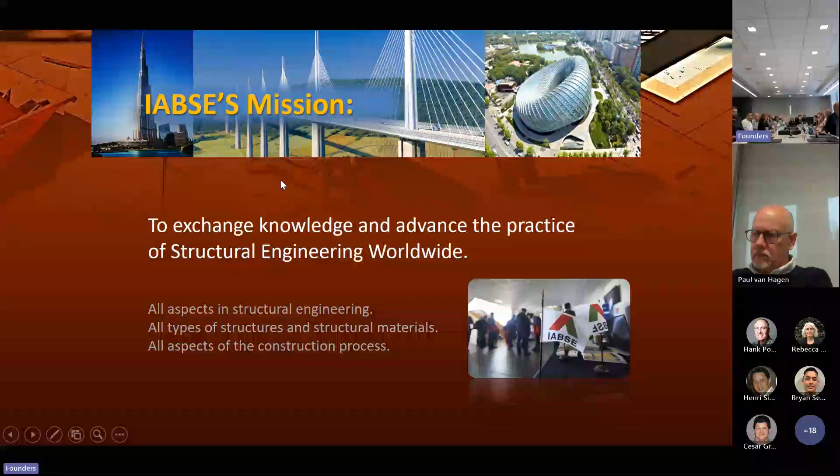I'm having to use the mouse to control the screen and then my other hand to control the laptop. So bear with me if I get in a bit of a tangle, but hopefully I'll be able to kind of write it as we go through.

So my name's Ben Addy. I'm the managing director of Moxon Architects. We're based in London and also in the Highlands of Scotland. We're quite unusual as a practice to have a very urban location and a very rural location. We're also a very unusual practice in that we do conventional architecture, so buildings and product design and what have you, and you'll see some examples of that. But we also do bridge design, which is obviously the reason why we're in this room with you today.

And key to that is my good friend and colleague Ezra Groskin here, who shares a background in bridge design and bridge architecture with me. So I don't know if you want to add a few more words. Yeah, as you might recognize from my accent, I'm originally from the US, so this is sort of like coming back for me. But I've been working in London for 15 years, kind of exclusively designing bridges, and then I joined Ben about 8 years ago to continue that work.

But quite special to be in a small practice that does bridges and buildings, which is a balance I was looking for. And I think you'll see, whether we're working on a bridge or on a building, we bring the same kind of interest in design and interest in solving puzzles and interest in how things are built. All these things you'll see through the lecture, but those are things that are important to both of us.

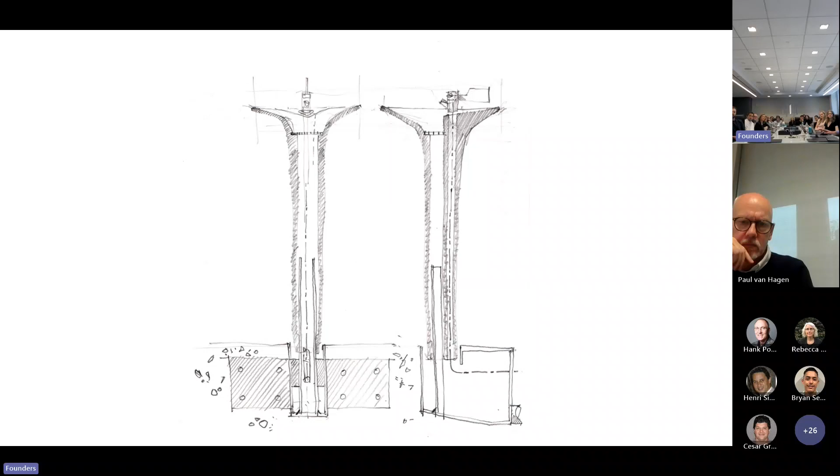Now, it was won in an open international competition, and it's the first of two examples of industrial design that I'll share, because it encapsulates this idea of economy of purpose. So it does the thing that it's supposed to do, which is deliver clean, hygienic water, but it does several other things at the same time, to all manner of users, canine and otherwise. So there's a dog bowl at the base, which is the overflow from the top. It drains down into this dog bowl before it then goes into the sewer system.

That's also a trap. So if someone drops their wedding ring in the top, it'll go down the funnel and pop out the bottom into the dog bowl. You might need to clean it afterwards. But it's this idea of achieving several things at once. It's also a bollard. So this thing can be used as a vehicle restraint bollard. The way in which it connects at the bottom is integral to that. So it can stop a light vehicle.

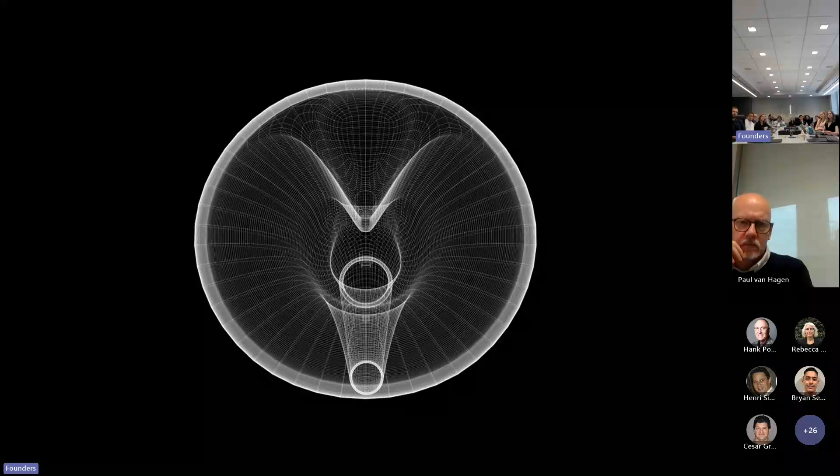And you can see here the refinement and the geometry, which is really important to us. You've got this one single form, which is the mounting for a faucet, for the tap. It's a bowl for splashes. You've got the drain. You've got the sleeve connection from the base.

The design is tap agnostic, so you can fit any tap that's available on the market onto this thing, which is really important for longevity, so that as tap technology develops, you can put a new infrared tap on the top or what have you. And again, that's something we've taken from that architect at the beginning, Cedric Price, who had this idea of flexibility in use, which is really important.

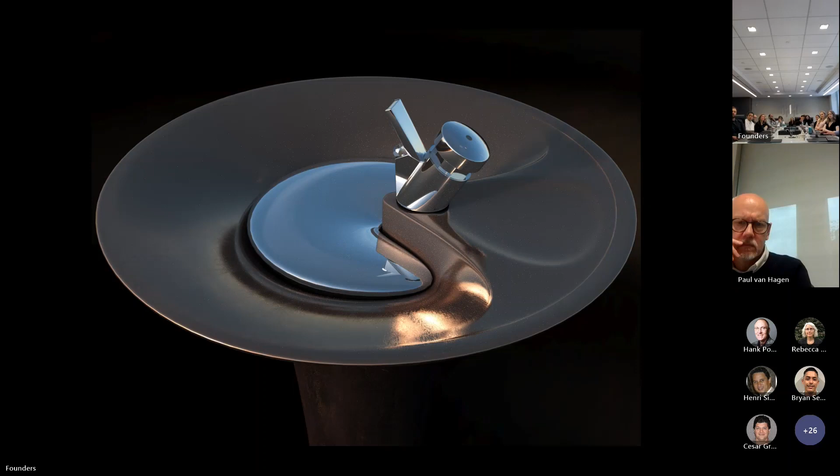And then we're interested in aesthetics as well. So the form of this thing is really important. It was one of our first forays into rapid prototyping, which is obviously common in what we all do now, but this is like 15 years ago. And this was kind of novel for us.

Are you able to? Yeah, that's probably better. Yeah. Right, we're going to team effort this. It'll go a bit quicker now.

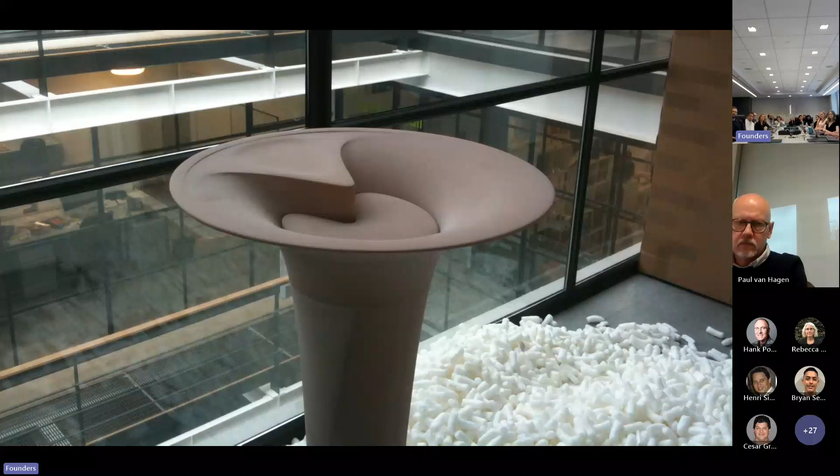So this is the actual master part that was milled from the material that then went into form the lost wax casting. So this is in a bronze foundry in Wales in the UK. And you get this incredible kind of beautiful bronze piece that comes out at the end of the casting process. You polish it up. Here's our first customer in the Royal Parks. And then it patinates over time.

So the weathering, the way this material behaves over time, again, this comes back to bridges. It's exactly what we think about all the time. And then here's one of them outside Kensington Palace. I think there's about 3 or 4 in Kensington Gardens now, but like I say, they're all over London. The dog's just been at that one 5 minutes beforehand. This is our first bridge of the afternoon.

So that's our kind of design philosophy in a nutshell through that project. And I think hopefully, yeah, there we go. So this, Duke's Meadow Bridge. So this is a footbridge in West London that we designed with COWI. So we work with various engineers, and we're really keen to be working with yourselves, both in the UK and ideally in the US in the near future.

But you'll hear me talk about various engineers that we work with throughout, because it's always a team effort. It's never about the architect says this and someone else has to make it work, or vice versa. It's always a team effort.

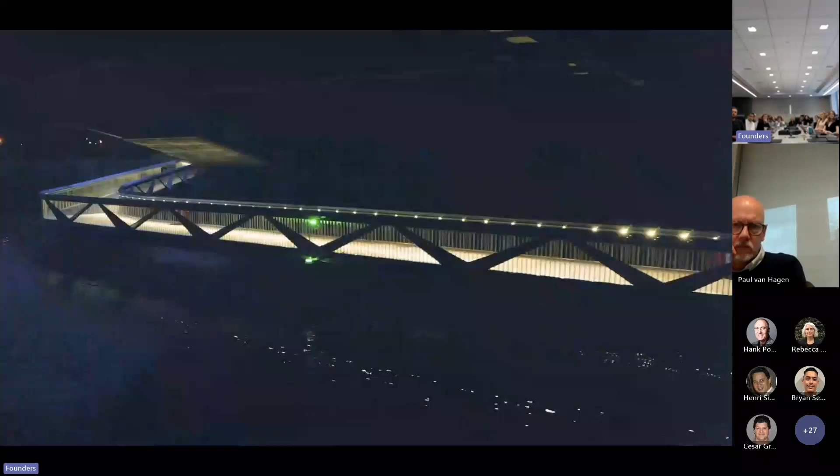This bridge doesn't go across the Thames, it kind of runs alongside the Thames, and it fixes a link of what was a previously broken Thames path that runs along the river. And the second of our bridges to do this, actually after another one in East London. But here you can see the parapet is the primary structure, which allows us to kind of thread this thing underneath the existing bridge and still maintain clearance between high tide and headroom underneath the arch of the bridge.

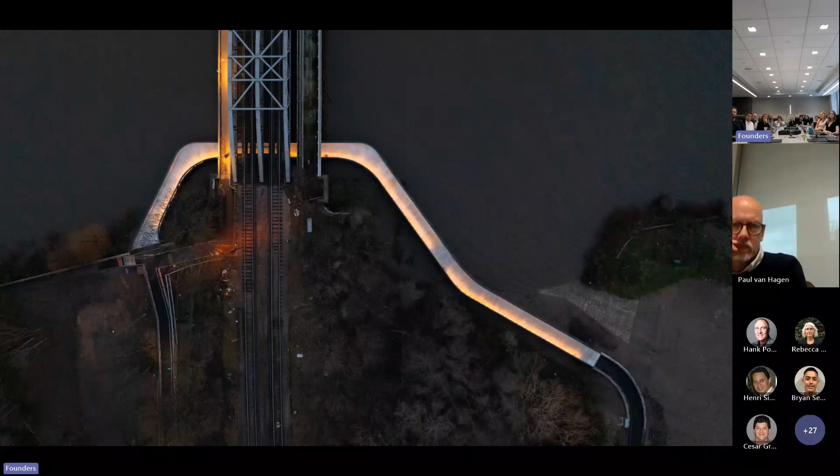You can see in the plan here how, I mentioned about the belvederes on the bridge. This is the one where just the widening of the corners there enables people to kind of congregate on the deck. See, get this amazing view up and down the river. It's also a perfect location to watch the Oxford-Cambridge boat race. This isn't the boat race; these are amateurs. But you get the idea. It provides this new space in the city, just from otherwise a very functional link along the river.

Some more views of it. So you obviously identify this as a very, very simple truss, but we're using the truss as the handrail and the restraint all at the same time. So the structure, the parapet, everything is one piece, which again is about efficiency.

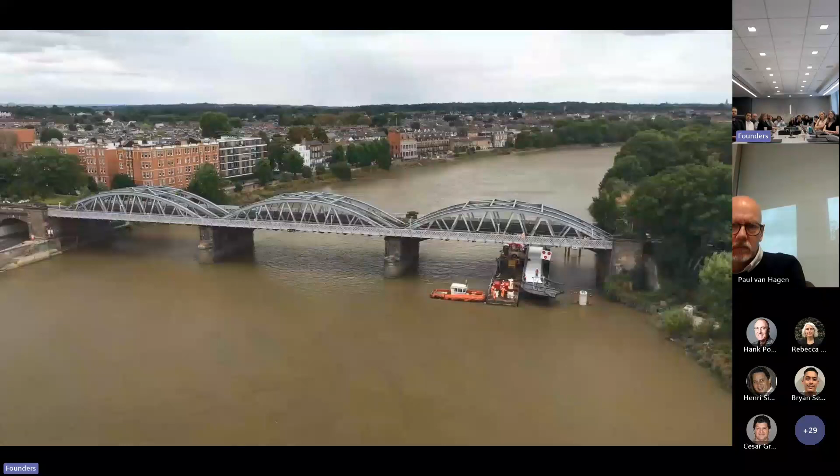Now, each part of the bridge was brought up the Thames from Tilbury Docks in East London. So it was floated above the piers, and the Thames is tidal at this point. So as the tide rolled out, the deck was lowered onto the pier. So you let nature do the work, which is the most efficient thing you can do.

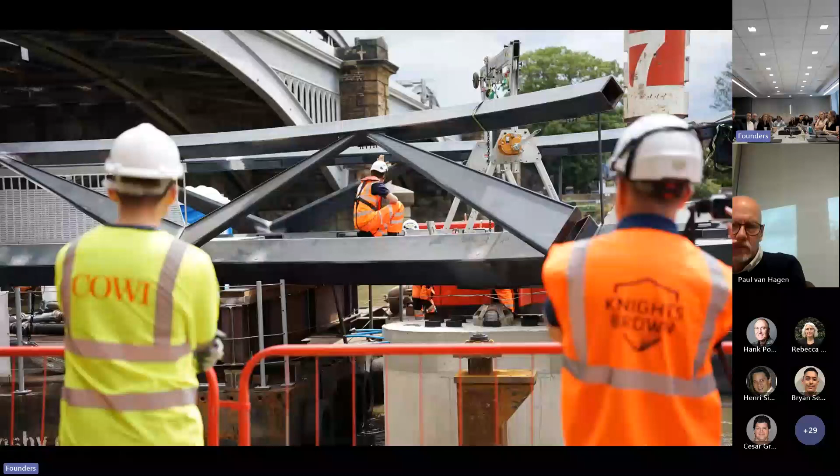Of course, it's not quite as simple as all that, because while we're relying on gravity, we also relied on a particular bit of temporary works that was designed by the engineer, a guy called Chris Murphy, who designed this 3-part locator pin, which is a component on top of the pier, without which this bridge would not have ended up in its perfect final location. It's somewhere in this photograph, and no one who uses the bridge is aware of that, but we're aware of it. And if it wasn't for that locator pin, the bridge would have been very different.

And again, bridge engineering in particular is full of these kind of stories of ways of achieving things in construction that could not have occurred without that kind of genius going on. So it's a privilege to be part of that kind of conversation with architects.

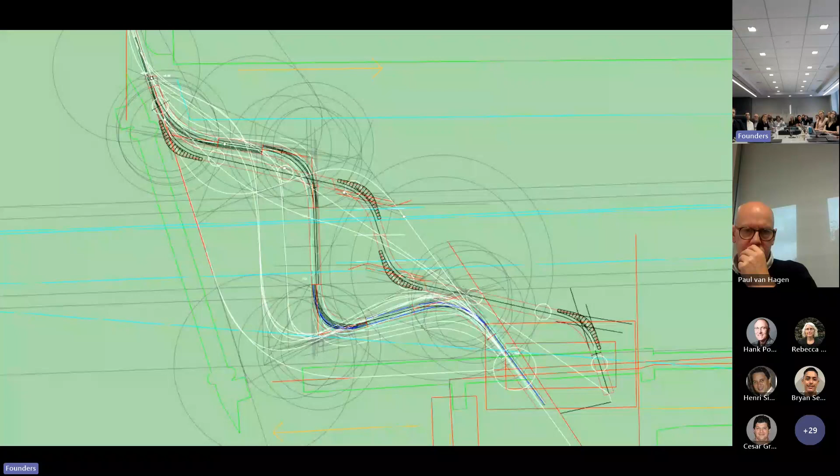Now, the next bridge that we're going to show does legitimately go from one side of something to another. In this case, it's the Royal Victoria Dock in East London. We love getting involved in drawings like this. So this is a drawing where we're looking at the constraints of a structure. We're looking at navigation channels that we need to maintain, the landing points. There's discussions with structural engineers, civil engineers, and also mechanical electrical engineers, all involved in this one drawing. This is where, as a team, we're working on this drawing together to work out what's the best alignment for this bridge.

You can see the ExCeL Centre at the top. There's a new development at the bottom, basically going to be thousands of new homes in the bottom right-hand corner, a big development going on. And then in the top left-hand corner is where there's a new train station. And people need to get from one to the other. So that's what this bridge is for.

So A to B, a straight route would seem to be the most logical thing. However, the blue lines in the middle, we need to maintain an infinitely high navigation channel. So we need an opening bridge. If we have a diagonal line across that channel, then that's quite a long opening section. So you want to come as square as possible to it, as perpendicular as possible, to minimize the cost. And the cost of the opening section is way more than the cost of the backspan.

So hence these kinds of studies, this sort of exploration. And eventually we arrived at this kind of form, which although it might seem inefficient, is actually not that much longer than a straight line, but crucially it has a perfect or nearly perfect perpendicular opening section, which keeps the cost down. So this structure was granted planning permission earlier this year, and the contractor is on board now. So I think construction is going to be starting this year at least.

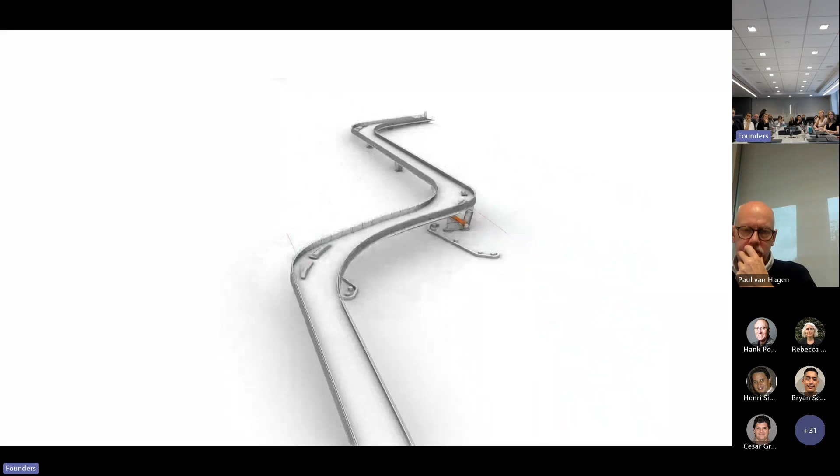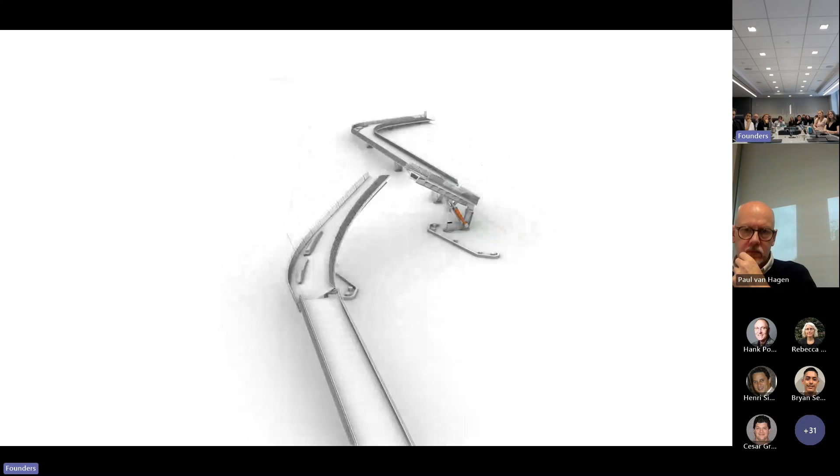And you can see here the opening section that we're talking about. So very, very straightforward. I mean, I'm in a room full of the absolute experts in opening bridges, so I need to be careful what I say. But you can see that it's a twin bascule. Each leaf of the bascule rests on the pier itself, so you don't need to worry about locking pins in the middle necessarily. The axis of rotation is the axis of the span leading up to the opening section.

So it comes as quite a surprise when this thing opens. It'll have this kind of twisting effect, but actually the mechanism and so forth is really straightforward and simple. And simplicity, appropriateness and a pragmatic approach to design is really important. And for us, the joy is in the detail.

So here you can see these are the actuators. So the rams are in this image on the pier. The little orange bit is where it rests, the bearing when it's in the closed position. The bridge is part machine, and it's quite enjoyable to express that. The design doesn't hide it.

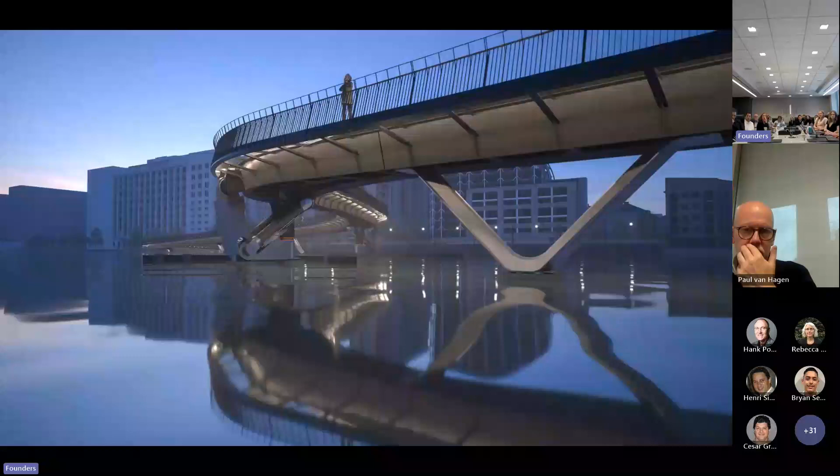And you can see the S-curving trajectory of this bridge. The V piers in the foreground. It's a bit of a vertical curve. So as you go onto the bridge, you are climbing, and then you drop down again, to allow smaller river craft to go underneath it.

So you've got this kind of... that's the new development in the background, which is actually quite similar to Hudson Yards in a way, in terms of the focus on landscape, and we're taking the landscape finishes all the way across this bridge. So it's an extension of the urban realm, but you've got this amazing machine underneath it.

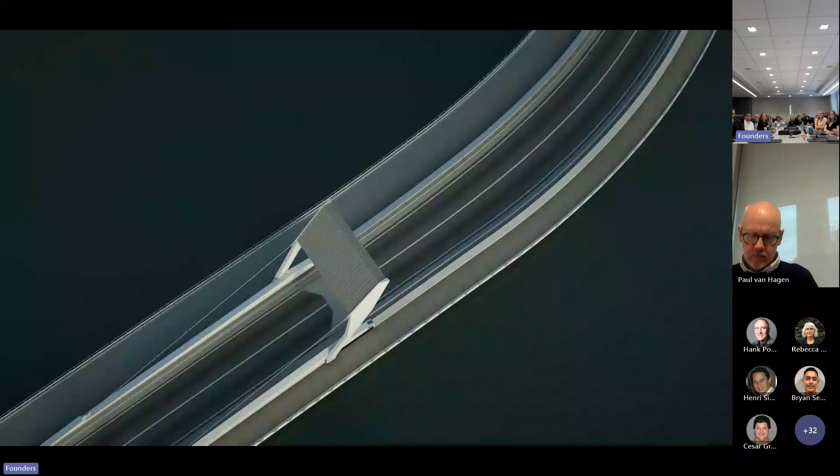Okay, so just briefly on another opening bridge. This time it's in Dublin, in Ireland, where the port has had this amazing boom in business after Brexit. So once the UK left Europe, instead of all European stuff coming into the UK and then going to Ireland, it's bypassed the UK and goes straight to Dublin. So the port is incredibly busy, and as part of that, they need new road links across the river, which need to be opening links because all the other bridges up the Liffey are also opening.

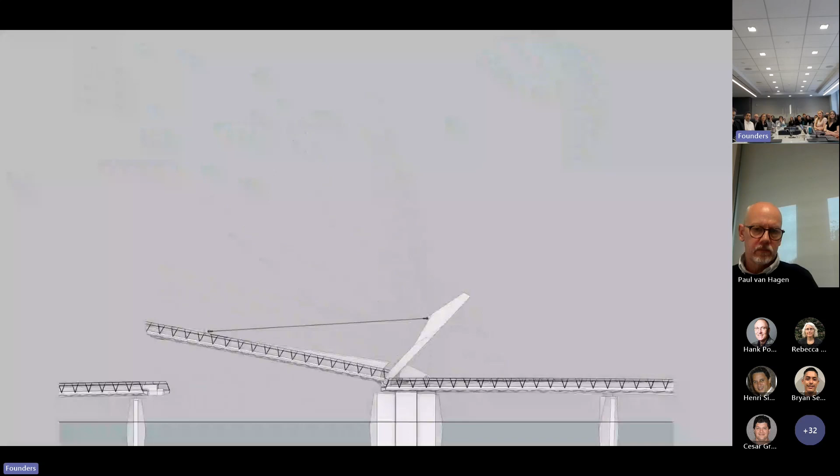So you can see here it's a bascule bridge with a counterweight. So again, nothing unfamiliar. And there it is in the open position. But the sharp-eyed amongst you may have noticed that there's something slightly unusual going on with the pivots, particularly of the counterweight arms. So that gives the game away. So this is another piece of ingenious design, and there's one of our colleagues in the office, a chap called Richard Bridge, which is the most appropriate name for a bridge designer.

And he had this idea that if we introduced another fulcrum, so another pair of pivots, and brought the fulcrum of the counterweight forward of the hinge of the deck, then that would mean that in the opening sequence, the effect of the counterweight would be felt far earlier than if it were just fixed like this. Does that make sense? So it's actually, in terms of energy, a more efficient opening sequence for the bridge.

Plus, obviously, you've got the drama of this sort of scissor movement that's going on. Yeah, I mean, there's always this joy in the detail of how these things all come together. We could spend a whole afternoon talking about the design of this.

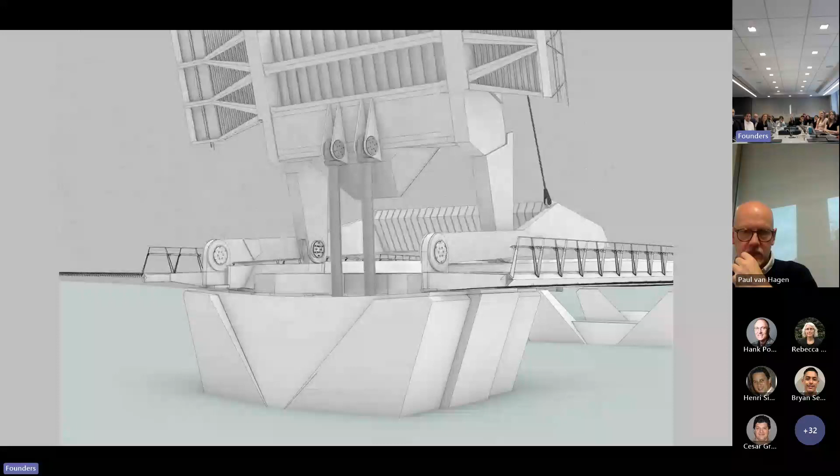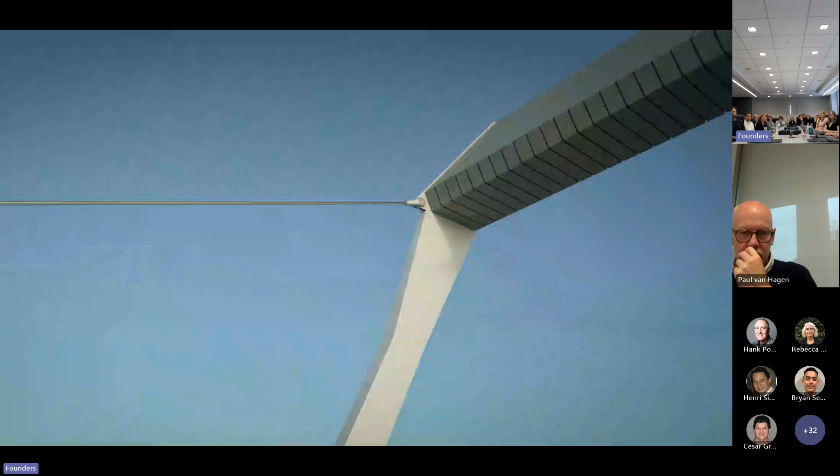Now, in the closed position, the counterweight is obviously also a demonstration of mass and energy, hung above the carriageway, forming a portal. So it's important that this bridge is a gateway both along the river, but also a gateway along the bridge for the port. Now, I think we are still exploring the use of granite as the material for the counterweight. So rather than using steel or concrete, there's obviously carbon savings to be had there. So we'll see where we get to with that.

So the second category was economy of action. And I think for architects, are there any architects in the room? There's one, two, okay. There's at least four of us who are architects. And I think that this is the bit, certainly in terms of bridge design, I don't like to divide it into disciplines because I think it's kind of false, but this is probably the bit where as an architect, you probably do have the most potential for impact in bridge design. And it's about this idea of picking things that can just be turned or twisted or changed just subtly, and it can have an enormous impact on the appearance of a structure.

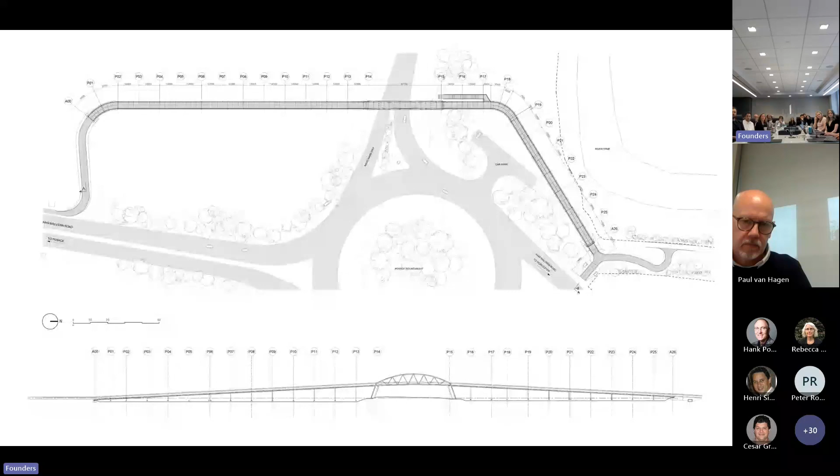So the first example here is this really modest foot and cycle bridge called Hamsway near Worcester in the Midlands of England. You can see even from the drawing, it's a very straightforward brief. It's basically just get around a busy roundabout. And in the elevation at the bottom, you can see it's just a very simple tied arch. It's no different to hundreds of other bridges that cross the trunk roads of England. And indeed, the brief from the client was that it should be like other similar bridges. But what makes this not normal are some very simple, modest moves in the design that elevate the appearance above its more functional utilitarian brethren.

Firstly, you can see here that the parapets lean in the direction of the cycle traffic. So this is a cycle bridge, with hundreds of cyclists today using it as part of a national cycle route. And just that subtle shift changes the perception of the bridge, that someone has thought about it, there's some craft in it, it's relating to the direction of travel.

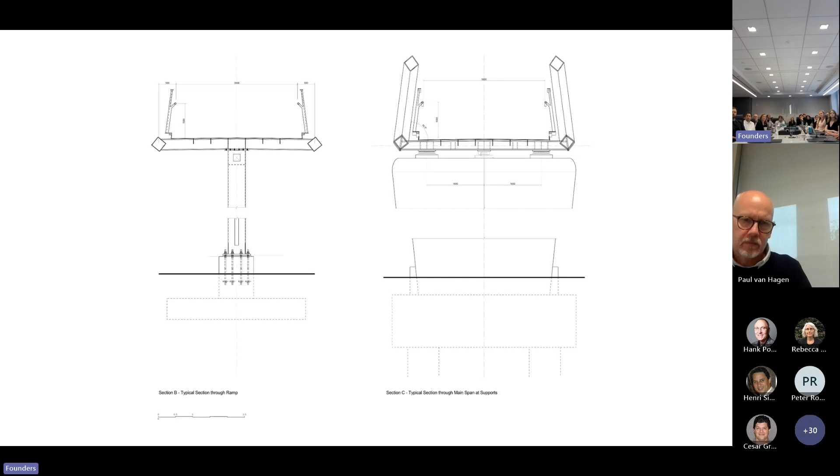The approach spans couldn't be more simple. So on the left-hand side here is the approach viaduct. It's just a series of columns and some beams and then some edge beams. And then on the right is the arch truss. But to unify them, you can see the outer chords, the square hollow sections, have been rotated through 45 degrees. So a very simple move, but when you see it in reality, that has changed the appearance dramatically. So you get this thin edge, you get light and shadow, and the way in which all these pieces come together takes away from what could otherwise be quite a dull structure.

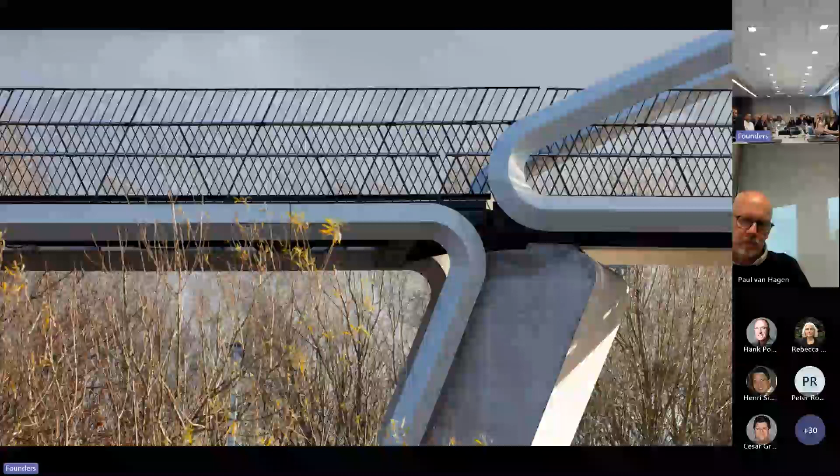And then these two things come together at the springing point of the arch, the main span on the right, and then the viaduct back span on the left. You can see where these things don't quite meet one another. So again, it's about expressing the difference between these two parts of the structure, but it's doing it in a really, we think, beautiful way. Hopefully you'd agree that it's somewhat more elevated from a basic structure.

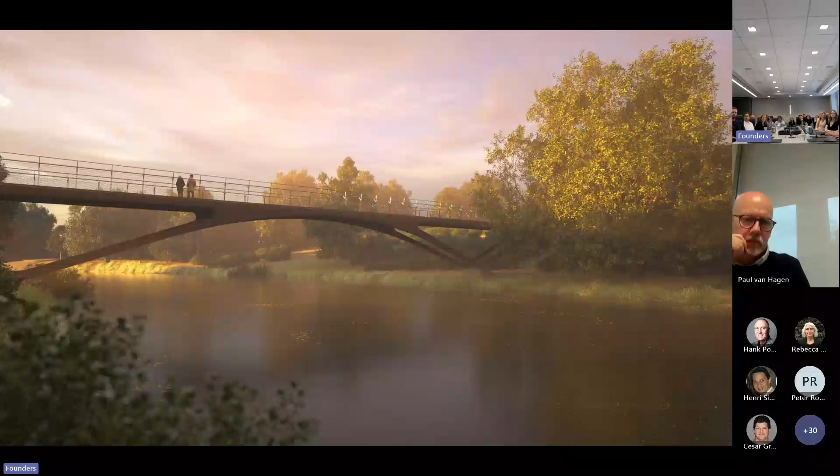Now the same team, again working with colleagues at COWI on another bridge near Worcester, this time across the River Avon. The way in which landscape and bridges come together is really important, I think, for all of us as designers. Bridges can have such an important impact on their settings that you always need to be considering them in landscape terms.

So at the other end of the spectrum, I was going to talk about three of our viaducts for HS2. HS2 is the UK's high-speed rail network currently under construction. And we are part of one of the three very large contractor consortia building the line.

So EKFB, Eiffage, Kier, Ferrovial, BAM, they're some of Europe's biggest construction companies. They've had to team together to build this one bit of the line. And then we're working with Arcadis, Setec, COWI as engineers. And then there's little old us at the end. And we're like the smallest possible cog in this absolutely enormous,

enormous machine. But our clients, it's great to their credit that they have brought architects and our engineers and pushed us right to the front of the process and made us kind of instrumental in getting consent for all these structures. I don't know how many of you've seen Ian Firth's TED talk on bridge design.

So Ian Firth is former president of the Institution of Structural Engineers in the UK and chair of the UK's IABSE group. He gave a really brilliant talk, and in it he said that a badly designed and executed bridge is nothing short of an act of vandalism on the landscape. And two of our viaducts that we're doing for HS2 are located within what's called the Chilterns Area of Outstanding Natural Beauty. So I've had Ian's words ringing in my ears for several years now as we're designing these structures.

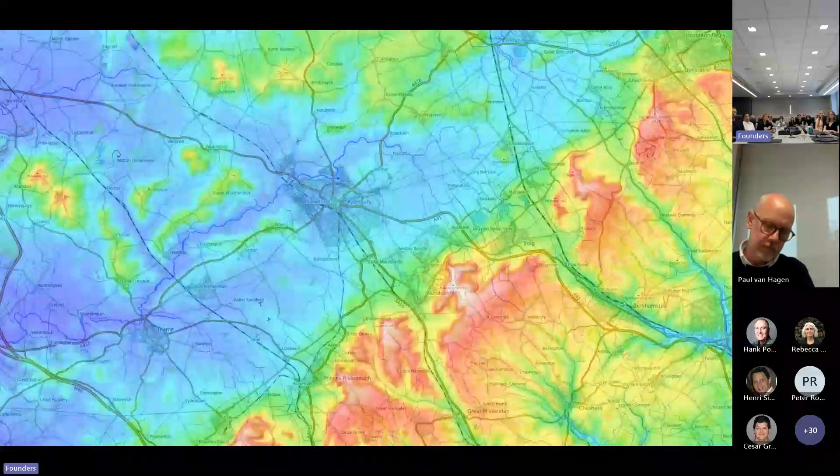Now, one of these viaducts is in the Missenden Valley, which is this kind of, you can see in this topographical map, you've got the pronounced diagonal line there, that's what's called the Chiltern Escarpment. So there's a series of chalk downland hills, really, really beautiful. You think of England, you're thinking probably of this landscape. And HS2, the railway, is cutting through this kind of narrow gap that you can see near the town of Wendover. And we've got a series of viaducts that help to carry the line north through that gap. The first of them being Wendover Dean.

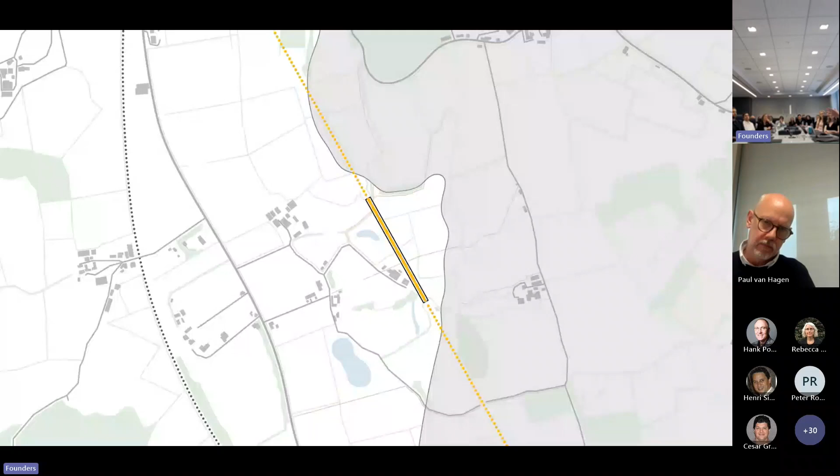So this is not like, you think about a viaduct like Millau, which is on one of your slides at the start, amazing structures that stride across the landscape against the sky. This isn't that at all. This is a viaduct that is sitting within the landscape, and that has a really profound impact on how you design such a structure and what's important. So you can see here that it's a pretty simple design. It's a composite or a double composite viaduct, so using steel and concrete in concert with below deck structure.

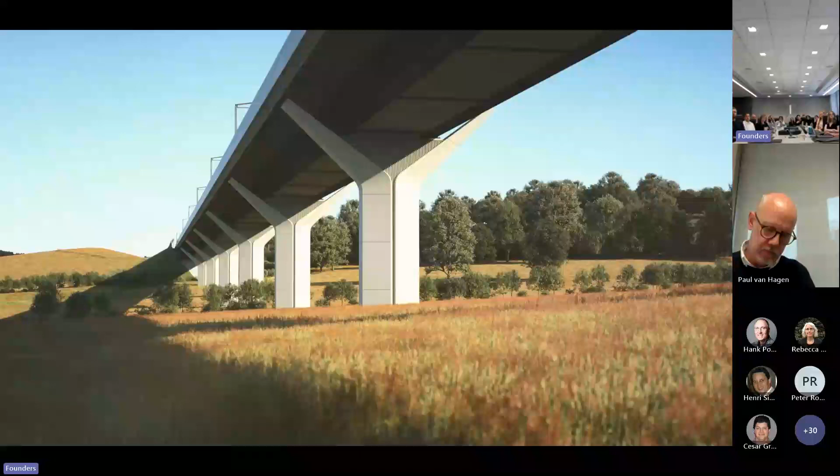Now, during the petitioning stage, as we call it in the UK, when HS2 was a bill in Parliament before it was made an act, the Campaign to Protect Rural England, who are a very powerful stakeholder in the UK, said that the design of this viaduct would be a litmus test for the quality of design on HS2 as a whole. So again, no pressure. So bearing that in mind, we do all the things that you think of as a bridge designer in terms of how this thing sits in the landscape, the span to depth ratio, how's it going to respond to the landform? Can we keep this thing nice and symmetrical?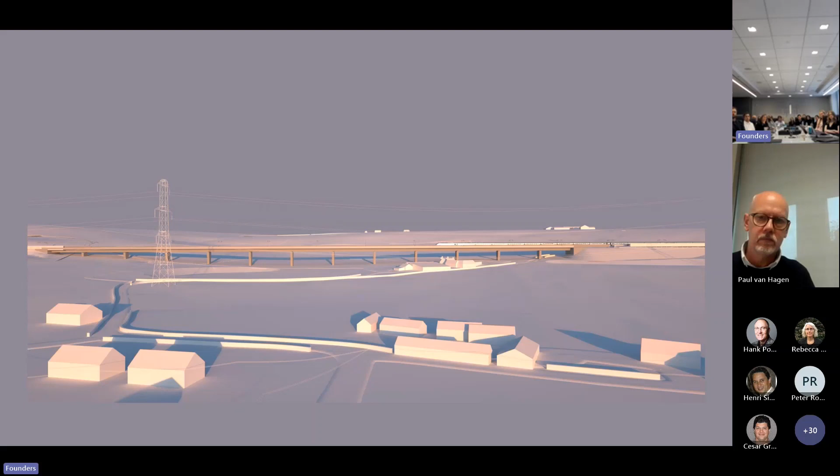Or we do something like this. So this is actually the employer's reference design that we were given as part of the brief. And you can see that this bridge could be anywhere. It's asymmetric. It doesn't really fit the landscape. The abutments are really crude. There's no real sympathy for what's around it. So the simple thing is we bring some symmetry. You rearrange the structure. You reduce the length of it. Make savings there, carbon and cost savings. Simple things.

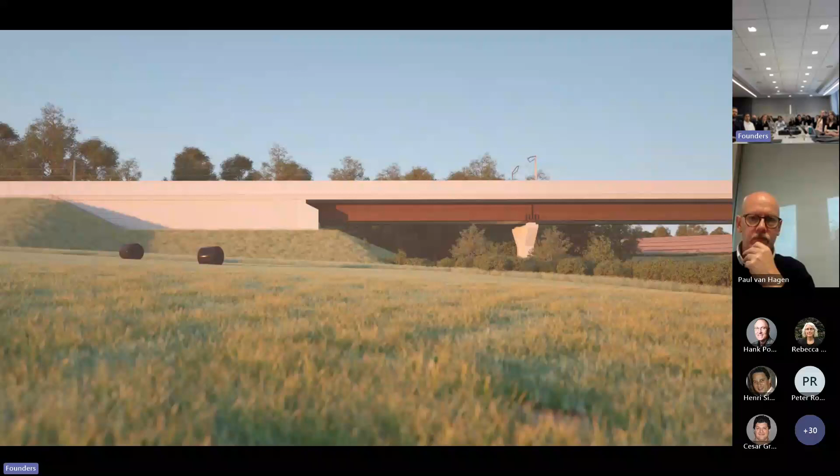Shortening the structure at one end reduces cost, obviously. But then even better, we can reduce carbon if we can replace that span with embankment. And you'll see that we've eliminated the clutter from the abutments by basically turning them into a socket in the hillside, so a sleeve, so the bridge disappears into a sleeve. See in the animation here.

So although this is a really simple structure, it's just a viaduct sitting on piers. If you focus on these details, you can see the pier heads as well, which extend beyond the bearing shelf. Focusing on these details, you can elevate this thing from being what could be quite crude, quite a kind of rude intervention in the landscape, into something really simple and elegant.

And the color of the steel, the way that sits against the rural landscape, the way in which all the landform is dealt with, these are balancing ponds at one end. All these things come together. It's not so much about creating a statement or an icon or anything like that. It's about just being crisp, minimal, polite, worrying about proportions.

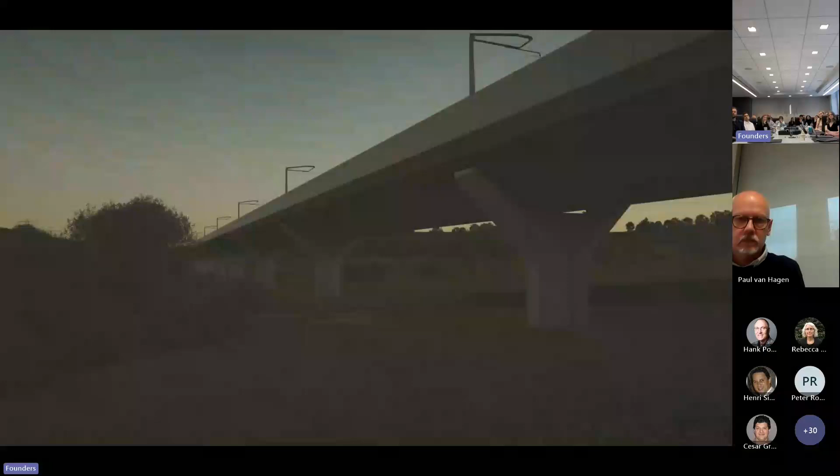You can see these piers where we have extended them beyond the bearing. So this is about accentuating the bright parts of the structure. So we've got the parapet at the top, which runs across the valley, and then we've got the piers beneath. And you bring the two things close to one another, and that helps to make the structural beam, which you can see in that image is really deep, recede a bit because you're pushing the bright parts out in front.

So it's a kind of visual trick. The sort of thing that Renaissance painters used to do a lot with the dark and light in the paintings.

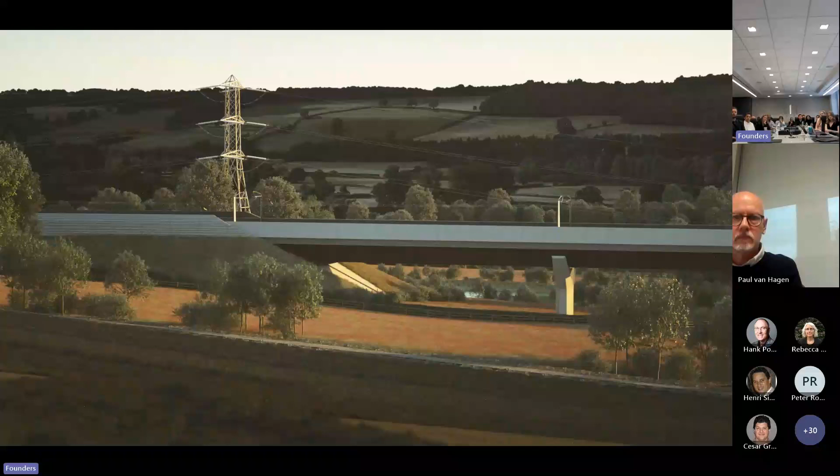How am I doing for time? 10 minutes. Okay.

We'll go quickly through this one. This is another viaduct which some of the people in this room will recognize. Do you want to talk about this bit?

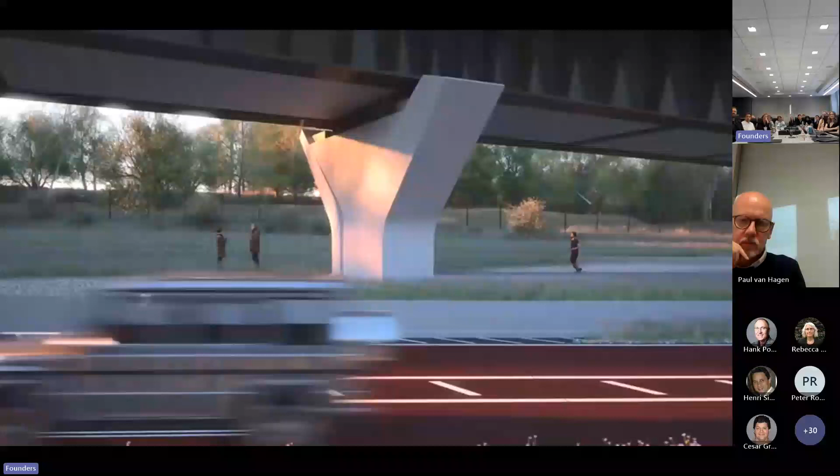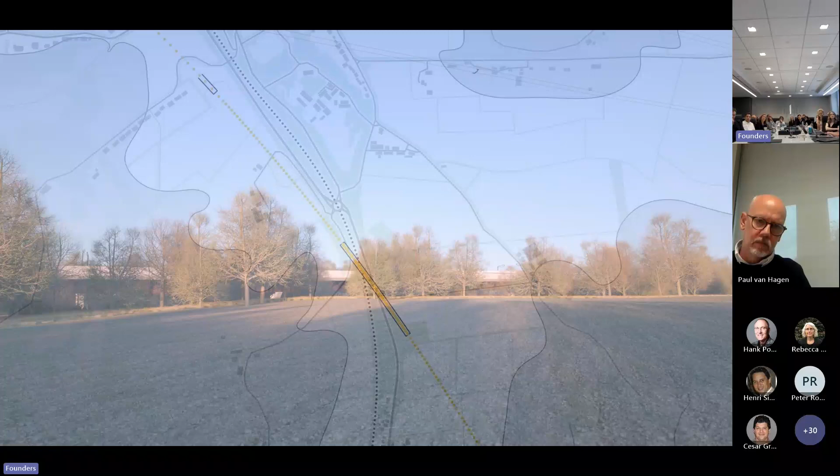This thing is not about the appearance in elevation as Wendover was, because it's sitting in this kind of hollow in the landscape, a little knot in the landscape, screened by trees and the rest of it. But close to, the public road, which is a very busy road, goes underneath this structure. So the appearance of this thing close up and in the oblique view is really important.

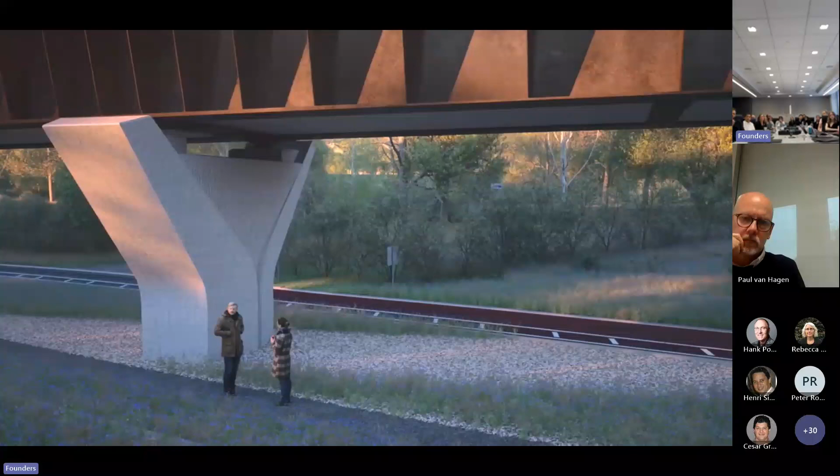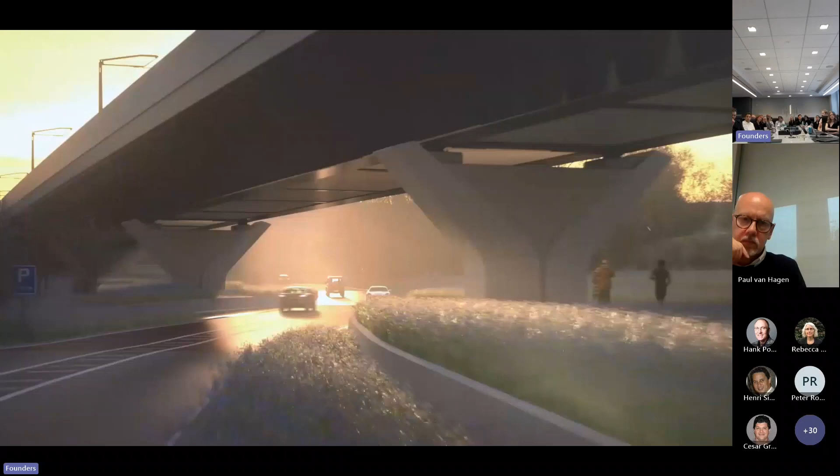What was interesting is the contractor wanted to be able to launch his deck with his formwork in place. So at Wendover Dean, the beams are launched, and then a formwork traveller goes across it to install the deck on top. Here, he wanted to be able to roll the deck out with the formwork in place, so he could quickly put a slab on it and then use it as a haul route, which is a construction issue, but from our point of view, it's a great opportunity for working with cantilevers in order to achieve that.

So working with yourselves to achieve that end, it means that you have a structure which is really expressive in the detail. Now this hasn't come from some sort of abstract idea or something that's not related to the place or the structure. This has come from a requirement of the structure, and yet this is what provides the key aesthetic of the viaduct.

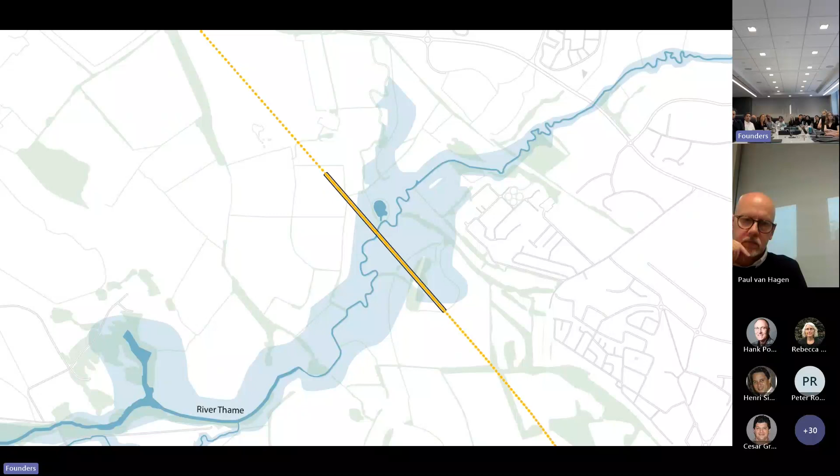So then the third viaduct that I was going to talk about is just to the north again, very different landform. It's so low to the ground, it's really an elevated causeway rather than a viaduct in a way. You can see the cross-sectional form is very different. And without going into the whole story of this particular structure, what's interesting about it is that the entire thing is prefabricated. So it's an entirely precast viaduct.

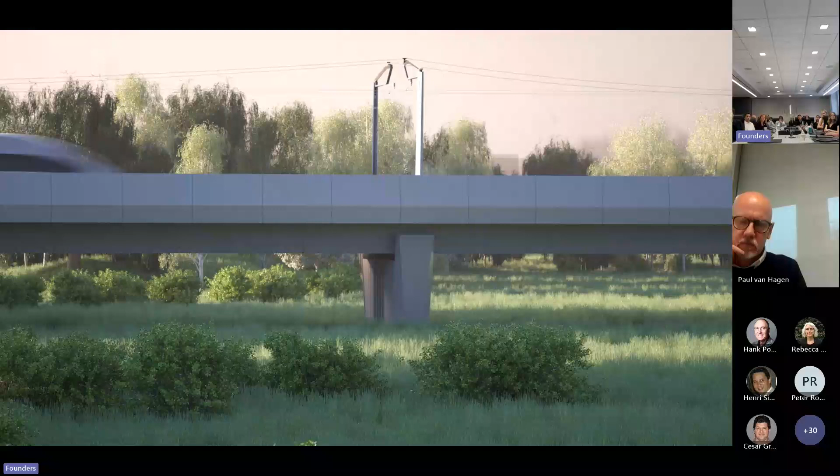So it's 1 kilometer long, and every single component is precast and brought to site like a gigantic Lego set. So there's very, very little by way of in situ concrete work on this structure. And you can see some of the visual things that we've been doing with the other structures are also at play here, in particular, the way in which the pier projects past the bearing, that masks the bearing. You can see the piers arriving on site last year.

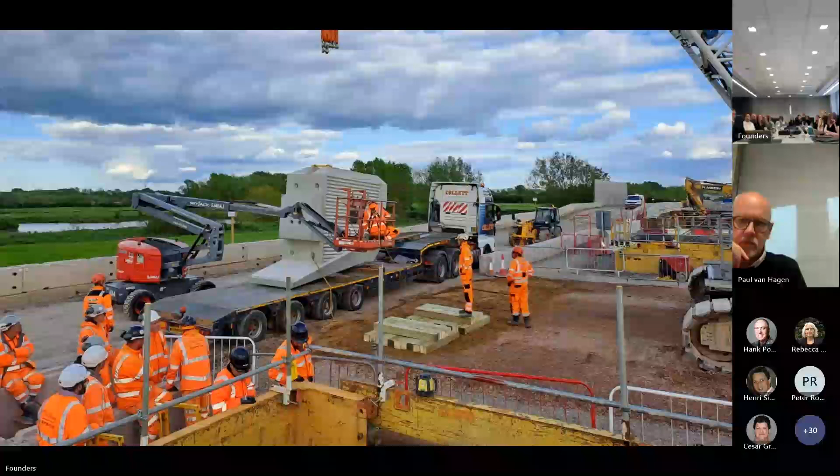And again, this form isn't just willful. It isn't just about doing something that looks nice. That projection has a piece of timber, sacrificial timber, stuck to it during construction, so that as the beams get lowered in, this forms a guide to push the beam onto its bearing. That makes sense? So in so doing, it removes temporary works from it. So it's again about simplifying the construction process. So the viaduct itself helps to build itself in a sense.

And talking about landscape and those previous viaducts, landscape is how we also approach buildings as well. It's the most important consideration. You have this incredible landscape in the Cairngorms. It's like a bit of subarctic tundra that sort of slips across from Scandinavia and drops onto the UK. You've got sublime, in the Victorian terrifying sense, absurdly picturesque, to kind of chocolate box. And our studio sits in amongst all of this.

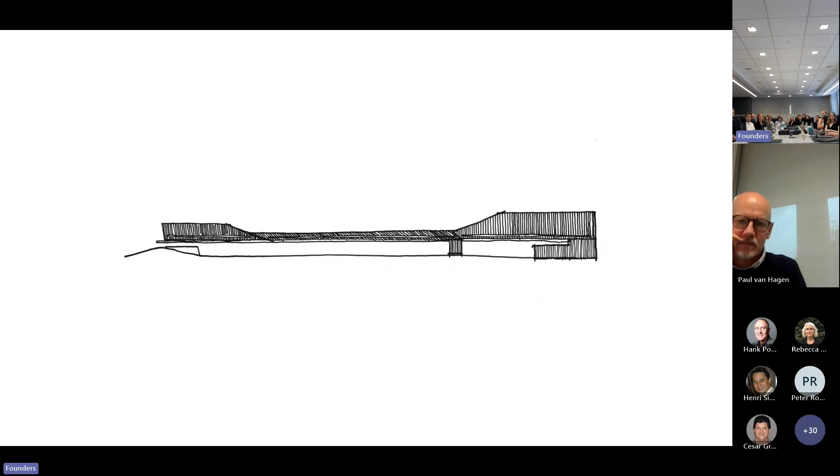So what does it mean to position a building in this kind of location? Well, it means exactly the same as to position a viaduct in the Chilterns AONB. These are very precious landscapes. They're under pressure the world over. So to do any development in these kind of locations, you need to be really thoughtful and considerate as to what you're doing. So here we're really using the form of the landscape to drive the design of the building.

So the studio is actually in a disused quarry, so it's a brownfield site. And we're taking the contours of a quarry and using that as the generator of our plan. So you can see the elements of our building coming together. These are two chimneys for fireplaces, so they're almost like the piers of a viaduct. You can see our studios at one end, and then we've got a public cafe at the other end. And then the building is built up around this armature that, like I say, is derived from the contours of the site.

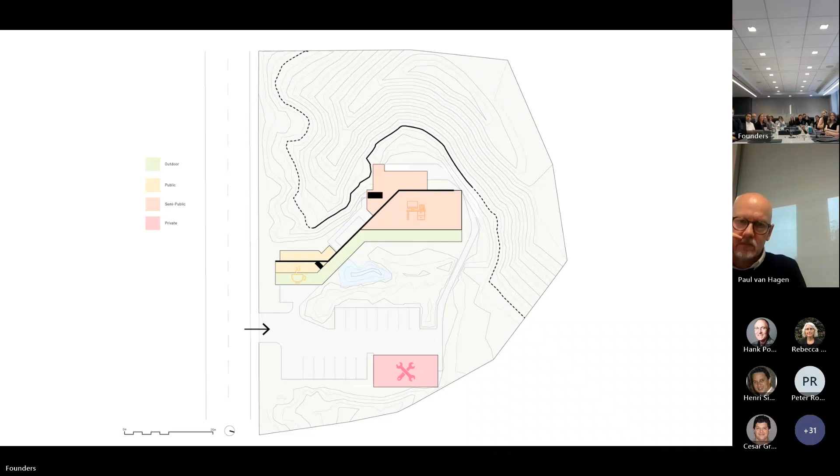So it's a really beautiful place to work. Very calming atmosphere. And like I say, it used to be a quarry, so it was full of really badly contaminated land, even though it's surrounded by this beautiful woodland. We've cleared up the contamination. We've got the pond in the middle, and the way in which we then seeded it, and we've got trees and what have you that have come in. So it's now an extension of the natural landscape around it.

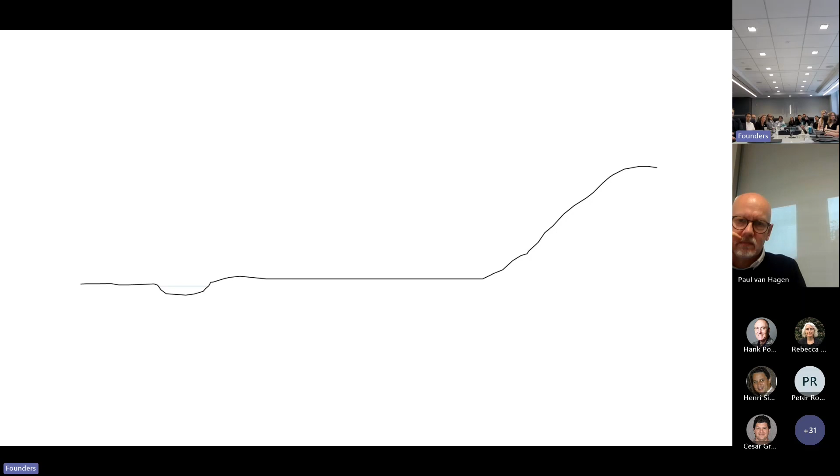And again, there's a lesson there in bridge design, because as bridge designers, we're always thinking about the landscape around it. It doesn't matter whether you're an engineer or landscape architect or whatever. It's always about the setting as much as it is the structure, and how things connect to that setting. I'll skip through these because this just talks about how it's quite a big building, but you'd never really perceive it as such because you look up the roof and you'd never get a feeling for how tall it is.

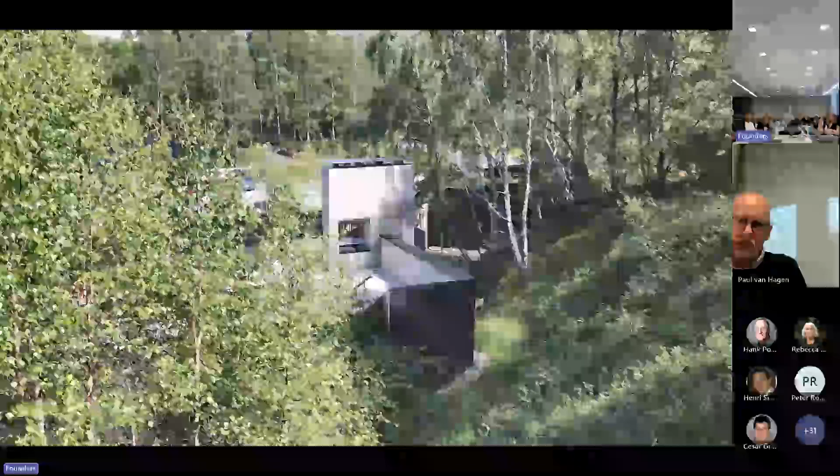There's another video of it. So because we have the cafe on site, this is obviously a very quiet day. Normally, the cars are double parked and there's hundreds of people queuing up for coffees and whatnot. And they all come wandering around our building because it's an open site. So we'll be working away on some nice bridge somewhere, and there'll be people at the window peering through like this, and then people go up onto the roof terrace at the back and they're peering down at us like this. It's like we're in a goldfish bowl. But no, it's a lovely place to work.

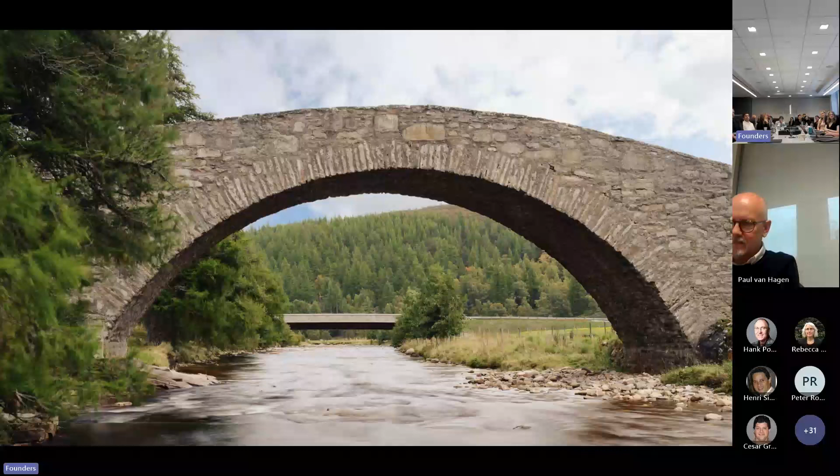And it's really cool, you can see the arch. It's a gorgeous bit of masonry. And our new bridge is basically taking all the vehicle traffic, because that was designed for horse and cart and foot soldiers, not buses and lorries. So we've built this new bridge alongside to divert the traffic. See it in the foreground there, and then the old bridge is now almost a museum piece. It's for tourism. So look at this beautiful thing.

Very happily, we've got very active neighbours who are really interested in architecture and design in the King. So he opened the bridge for us last year.

That's a kind of a segue back into bridges. I wonder if. Do you want me to chip in?

Yeah, I mean, they're on a roll, but this is one kind of close to where we live, central London, just north of King's Cross, part of a big development. And in this case, well, if we have time, you'll see the first bridge in the development that we worked on. But this was the second one, where a client had asked us to do a relatively modest bridge that was still something that would draw people's attention.

So in a way, it's kind of, I guess, economy of action, but something that basically allowed us to use a really simple form, so a truss, but because we knew it needed to be expressive, we boiled it down to the specific details, really refining one module and then repeating it along. Looking at how every single part of that module is working as well as it could. So expressing the compression members, expressing the tension members, angling the plates in a way that was working with the loads that they were dealing with.

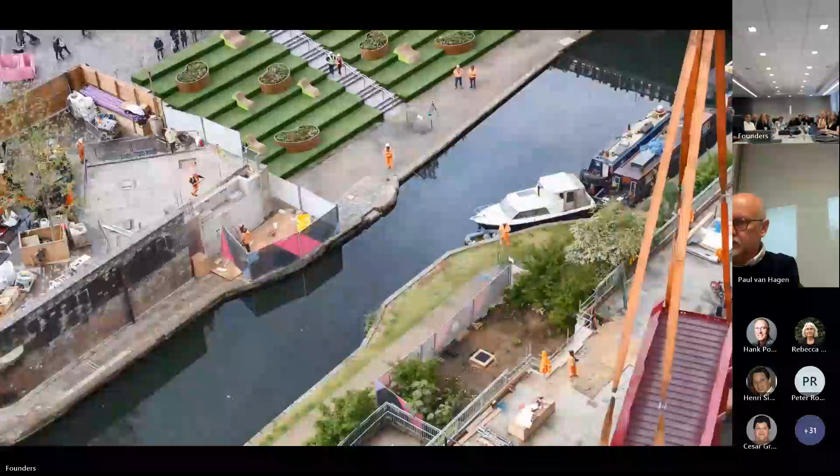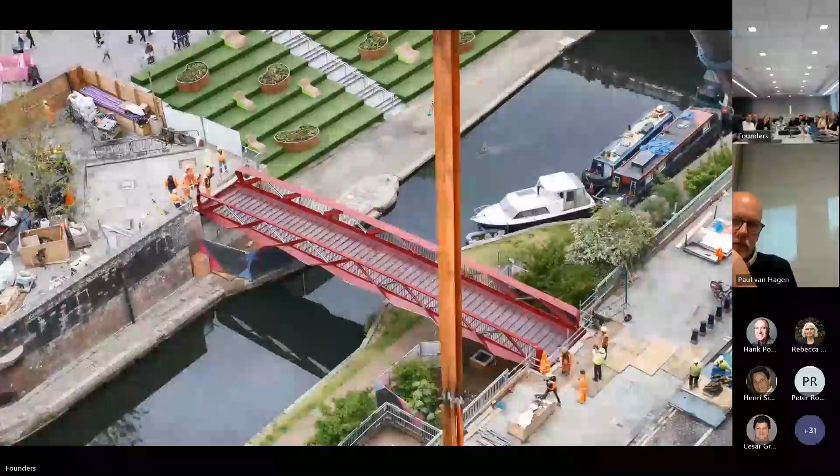And then I think the next level was how it contributes to the urban realm of the area. So what you can see, those green steps in the background are a place where people come to watch events in the summer on a big screen. So you get people congregating by the canal, and then this bridge forms kind of like a side balcony where you can get more people watching the event. It's great for people watching, and it gets really busy and lovely there in the summer.

Yeah, you're doing both for me. So this is the last of our three kind of economies, as it were. So economy of material, which is the most obvious one in a way. And again, I'm going to be a bit of a cheat and use not a bridge to talk about it, because it is all just design ultimately.

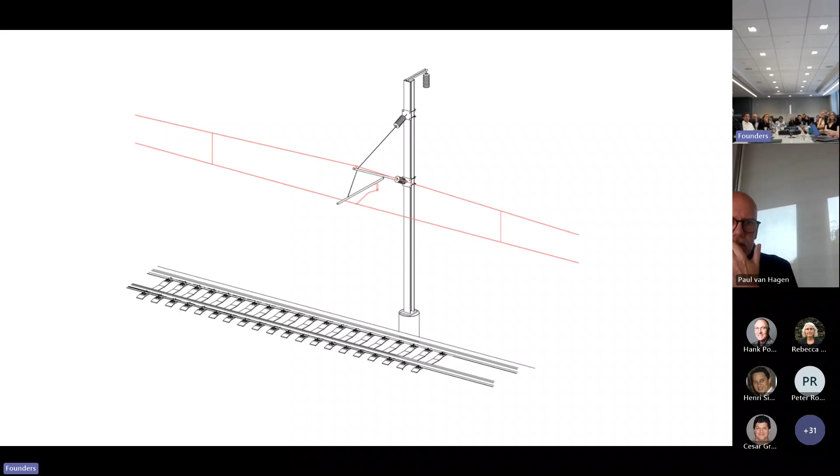This isn't, but the next thing is a competition that we won for a new type of OCS, so the overhead catenary system, or the overhead power system for an electric railway. You'll probably recognize this. This is a French system, but they all look the same the world over. They're kind of Meccano up in the air, hanging from wires with ceramic pot insulators. And this is a competition to rethink an OCS, to see if there's a better way of doing it.

So we took the view that actually all it's about is the position of the copper wire that carries the current to the train. That's the most important thing. Everything else, all that paraphernalia up in the air, is in service of achieving that. That wire needs to be at a very specific place for the train to get the current from it. And it needs to zigzag from one mast to the next, because if it didn't zigzag, it'd be like a cheese wire that would cut through the train's pantograph.

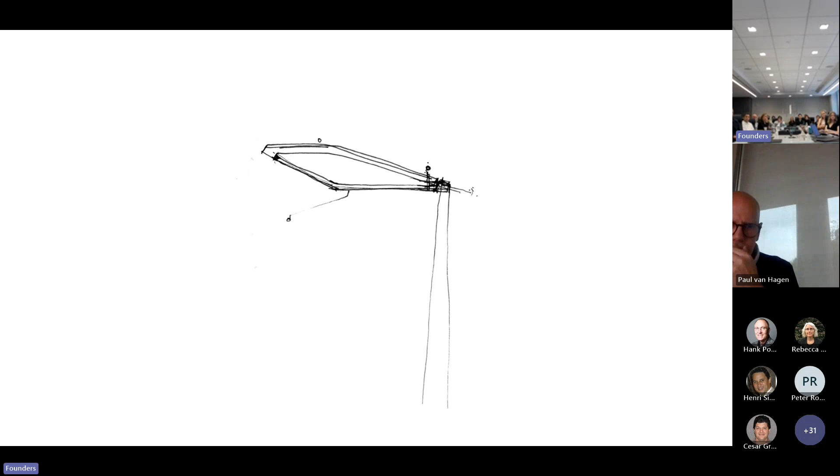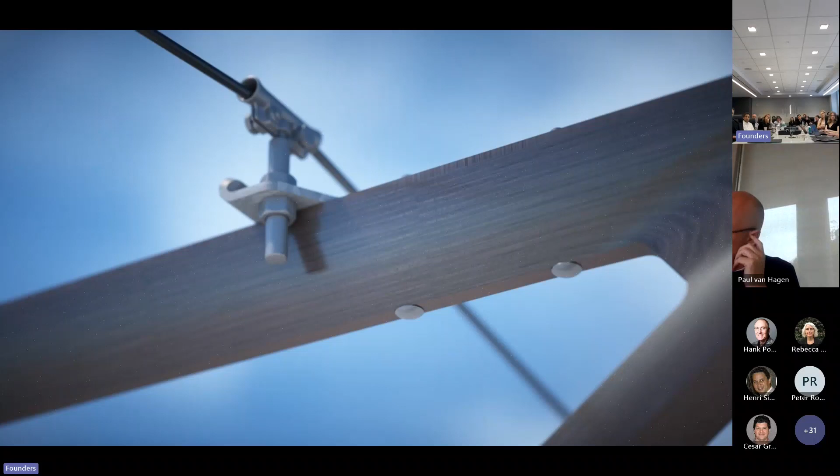Now, we use the same individual connection componentry of standard systems. So much like the fountain at the start, which can take any tap, this can take any type of wire attachment, whether it's in the US, continental Europe or the UK, any registration arm. These are some of our patent drawings. The connection at the back of the mast is patented.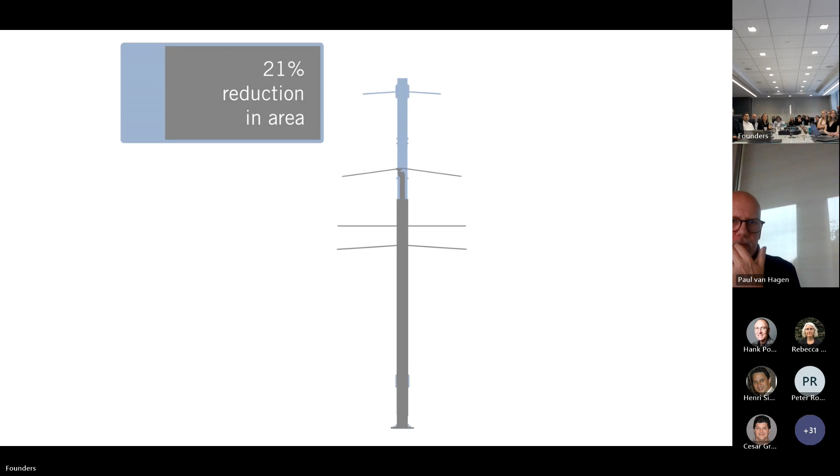Now, the advantages of it are a 25% reduction in height, because we don't need the tension wires and what have you to keep this thing up in the air. A 21% reduction in area. Again, same sort of numbers when you're looking in the elevation. But this is the really main one, 70% reduction in part count.

So all of those bits and pieces that are doing the thing on the left-hand side are replaced essentially with one component on the right, which is made out of what's called Permali, which is a densified wood laminate. It's basically plywood, but it's plywood that's been impregnated with resin at a really high pressure. So it's got incredible electrical strength. It's a kind of wonder material of the same generation as Bakelite.

It goes back 150 years, this stuff, but everyone's forgotten about it because its only use nowadays is in transformer housings in power stations where they get huge blocks of it, mill it out and stick the transformer in because it's strong and it's electrically strong. But otherwise, it's not got any application except for here. So we've used this material to form the component in our mast.

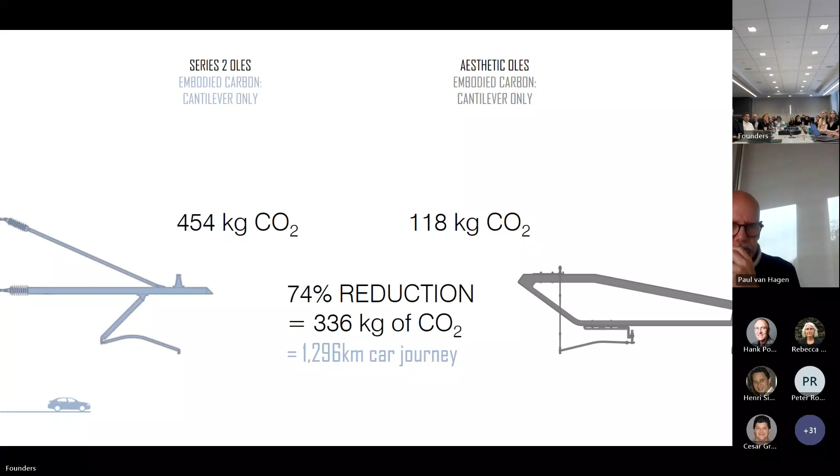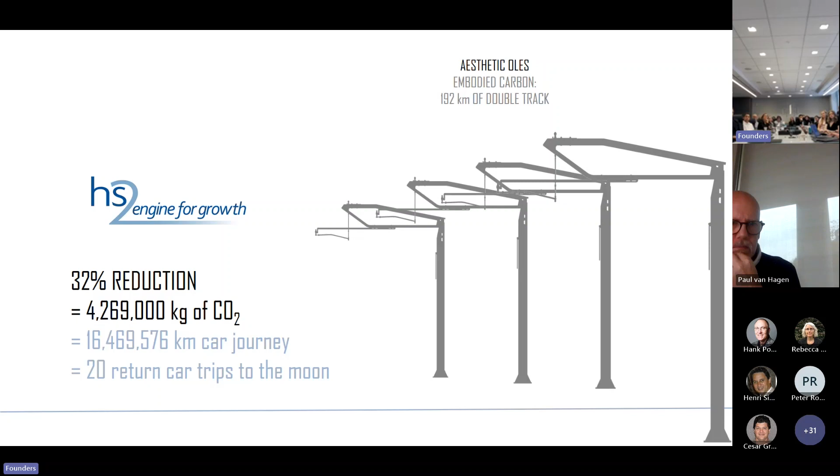And it gives you these incredible figures because it's essentially made of wood. You get nearly a 75% reduction in CO2 for just one mast. And then if you extrapolate that to the whole mast and then you run it across the whole length of HS2, you get this sort of incredible figure for overall carbon reduction.

I'm going to skip the next bit. How do I do that? Skip it. Oh, yeah, you need to skip it as well. That's really awkward, isn't it?

But there are examples of this. There's actually a park bench somewhere in Switzerland that's made out of this, and it's been sitting there for 120 years, and it's like rock hard, you know? So it's really a wonder material. It's a bit expensive, but it's comparable. It's comparable overall.

Let's get through these. I was going to talk about another building that we've approached in a similar way to the design of a bridge, but we'll skip through that. There we go. I'll let Ezra talk about some bridges in Germany.

Yeah, well, I think the relevance of this one is it's a timber bridge in Germany, and the way we approach it is really similar to the way we work on buildings usually, and it's all about protecting the structural materials. So timber has a ton of potential in infrastructure design, but only I think if it's used in the proper way. It's not just used for the sake of using it.

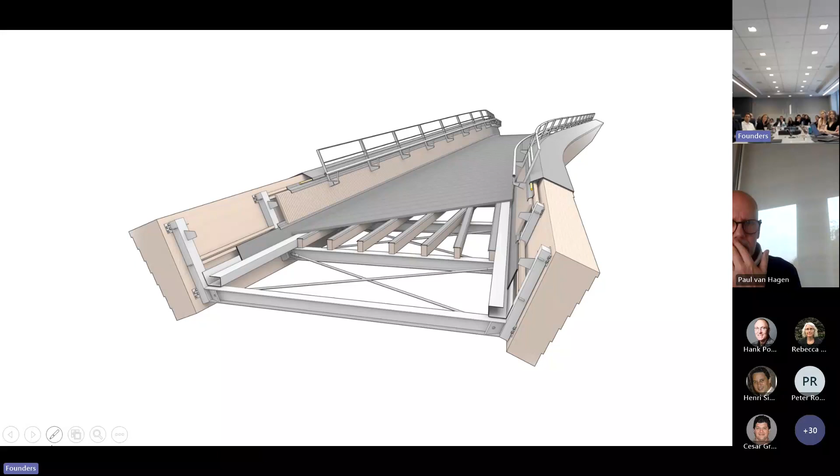But the way we've done it is we've oriented them leaning slightly outwards with a metal cap over the top and almost building cladding on the inside. So you end up with this expressed glulam structure on the outside, clad over the top. The form of it is very much related to its span and its structural performance. It's also in a flood-prone river, so the structure had to be above deck.

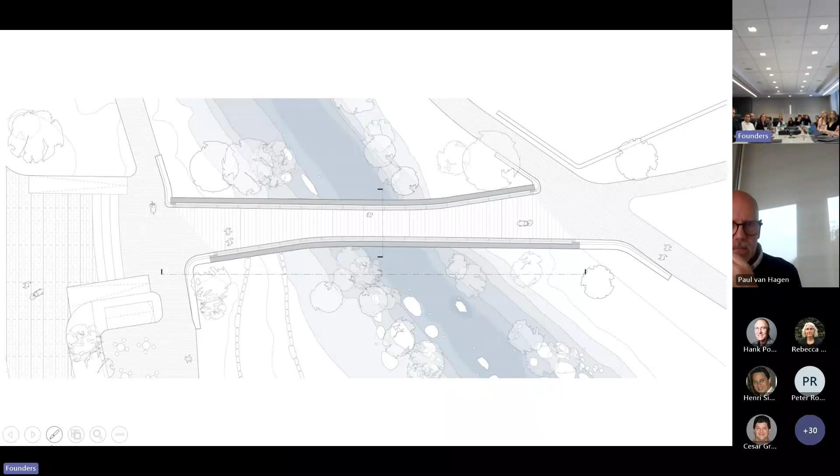We wanted to make sure people didn't feel overwhelmed by these really deep beams, so the pathway goes up and over and responds to the shape of the beams as well. That's difficult to keep track of one and the other.

And I think the other part of it is just understanding how these things are made, what the opportunities are in terms of form and structure. This is the second generation project we're working on with the same team in Germany. And in this case, it's a timber concrete composite structure.

So you've got the timber below shaped in the way it needs to be shaped to handle loads, but then the concrete above is actually what's protecting the timber, but then it's serving the double function of working as a compressive element at the top of the structure.

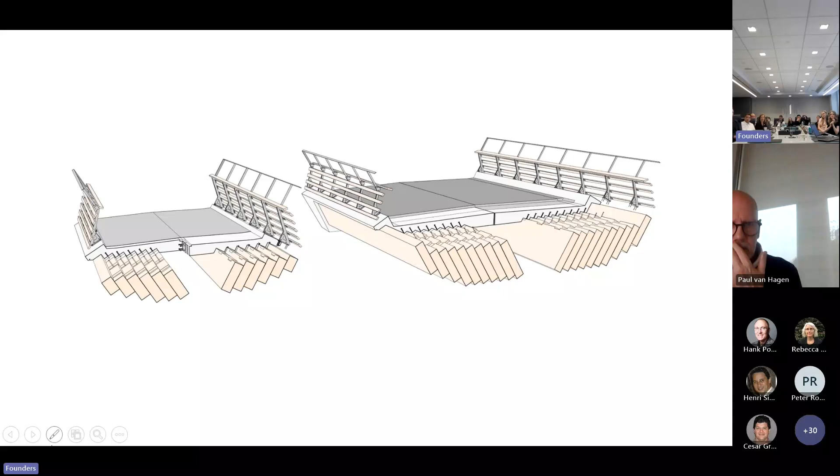This is back to me. I guess this bit's kind of quite personal. So we've separated economy of purpose, economy of action, and economy of material. There's three different ways of looking at this, but really it's a bit of a conceit, because I think you could have taken any of those projects and swapped them all up and put them in any of the categories. Because I think, like I say, economy is an objective in its own right for all the work that I think we all do, actually, particularly now with the focus on energy use and carbon content.

So I'm going to close my bit, and then Ezra's going to talk about something else a bit more current. I'm going to close on a project where these aspects are almost in balance, at least as far as I can see. Now this, sorry, this isn't the project. This is Metsovitikos, which is the very, very first bridge that I was ever involved with as an architect. So this is back in 1999, as part of the competition-winning team. There were only three of us on the team. This bridge in northern Greece.

We were working with Wilkinson Eyre Architects that I was working for at the time. So it's Jim Eyre, myself, and then Angus Low, who was an engineer at Arup in London. Then there's me with Angus Low on the left and Ian Wilson on the right. Ian Wilson retired from Arup last year. Angus Low sadly passed away last year. And these two guys are basically my engineering heroes. And we're very lucky. The people we work with are all kind of geniuses, but these guys have had such a profound impact on my career.

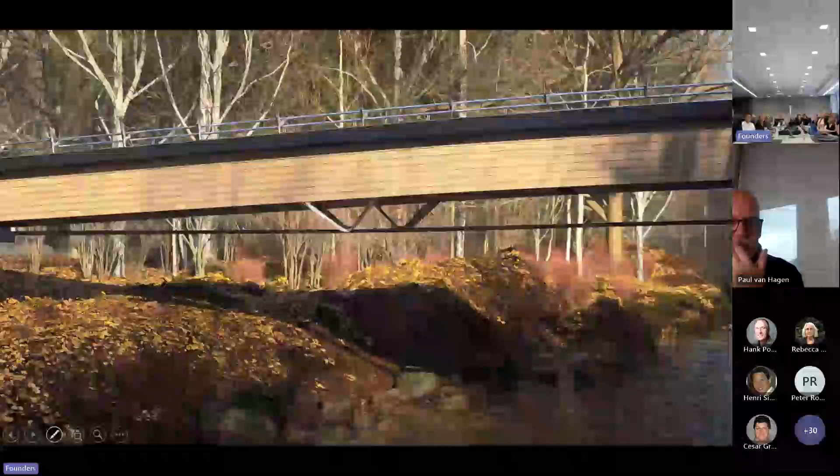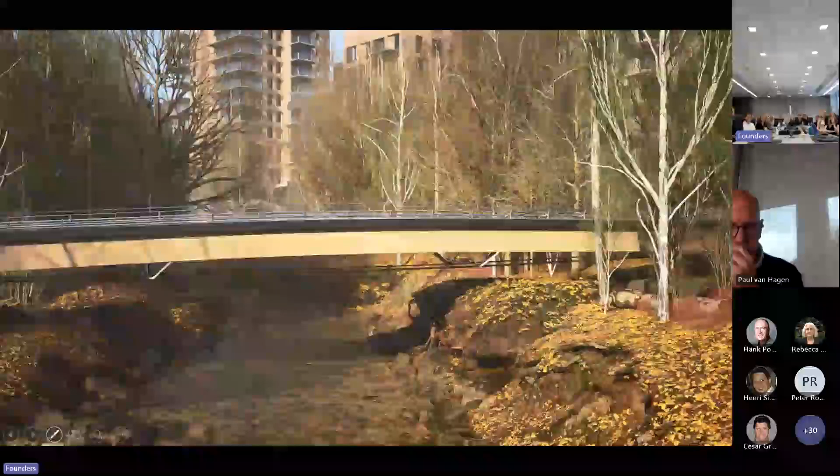That's the end of that. I'm just going to talk very briefly about 3 bridges that we've got on the go at the moment. It's almost like the bonus segment. So this is a competition. Actually, the jury's still deciding, but this is a competition we've done in Oslo recently where a developer client is basically building a whole new neighborhood, or converting a neighborhood from office space into residential space. And part of that, they've identified there's a river running down the middle of the neighborhood, and they want to put in up to 6 or 7 bridges to really stitch the neighborhood together.

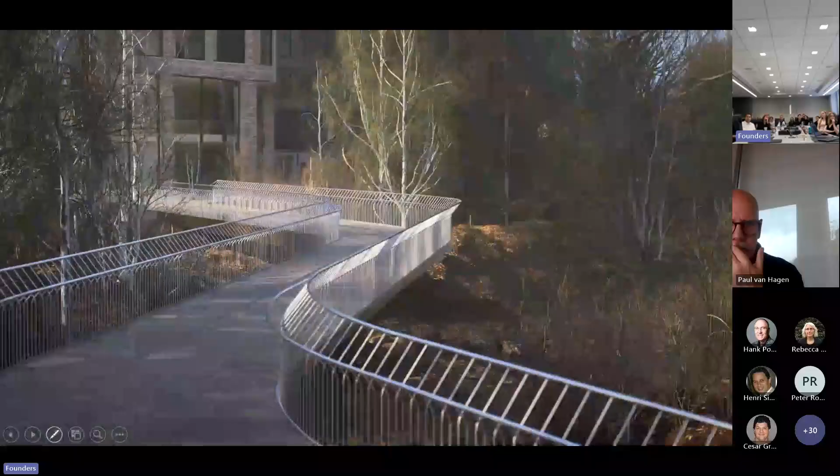They brought in a bunch of different architects to all look at different bridges at the same time. And we're looking at 3 in close proximity. And it's been a really wonderful exercise. Designing one bridge is always fun, but doing 3 at a time is actually a new thing for us. And it's really cool because you get to think about relationships between the bridges, and between the bridges in the landscape.

And in this case, we've kind of used the same design philosophy, but come up with 3 really different structures, and each one is related to its function and its location. So you've got one bridge which is working really hard geometrically. It's connecting 2 banks where one is much higher than the other one, so we needed extra length to get the slope to work.

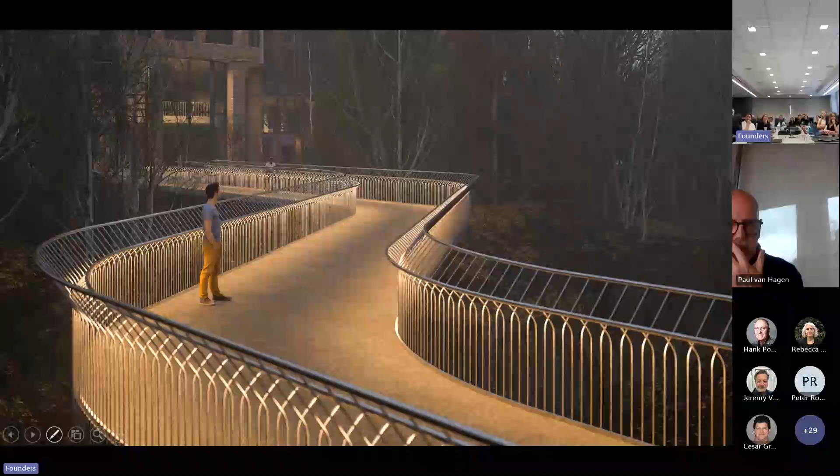So it's an S-shaped structure to work geometrically. It's also for cyclists, so it slows the cyclists down. Because it's doing that, we've gone with a steel structure, so a steel torsion box down the middle. And intuitively, we thought getting over the water as quickly as possible was the right solution, but the

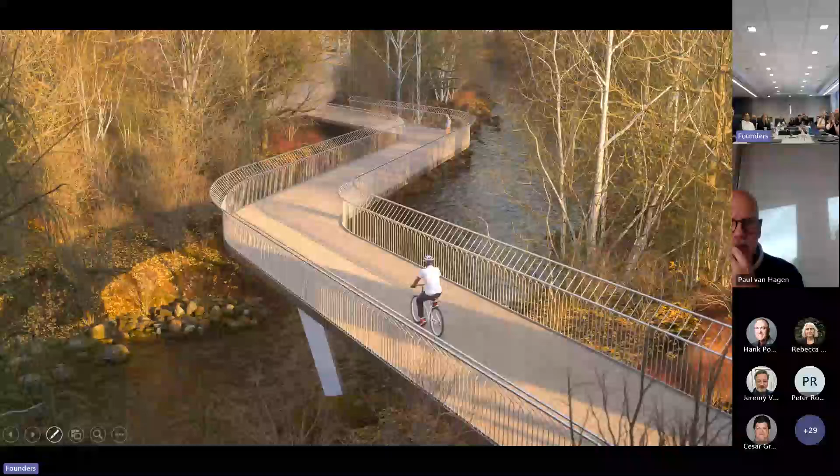client actually pushed for this unusual situation where the bridge actually runs kind of parallel right down the middle of the river, and then it spans the banks as quickly as possible. And we've been able to achieve that through the careful location of piers and crafting the form. And then, of course, we top it off with this nice handrail that runs along and expresses the shape. So that's one of them.

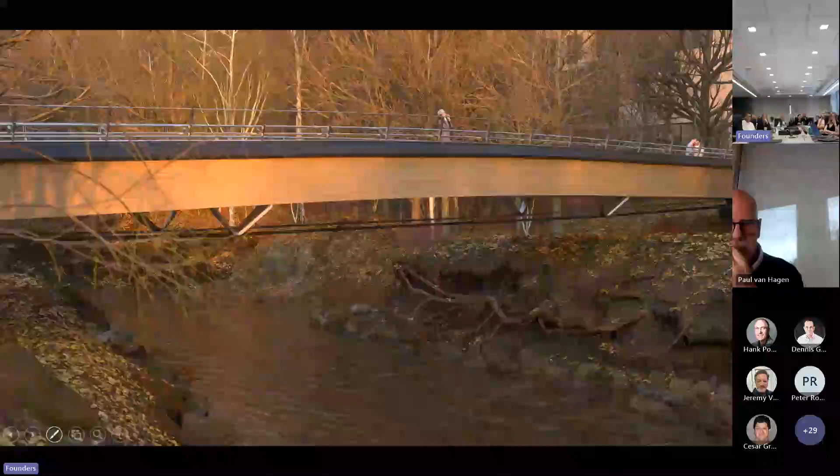The second one, the one at the top, is again connecting high to low, really kind of a straight shot, bringing users through the river valley at a high level. So it's almost a treetop walkway feel. And in this one, we wanted a really simple, slim, slender structure, bringing the abutments out to meet the structure, keeping the structure as short as possible.

In order to make it really slender, we've pulled the tension member out of it and underslung a cable along the bottom. So it's similar to that German bridge, but in this case, even longer, slimmer, more efficient.

And the third and final one is right in the middle, and it's actually the lowest of the bridges. So it's in the flood zone. Needed to be really robust. It beds in well with the banks at either side. It's around a bend in the river, so you've got asymmetry in the site. One side's the inside of the curve where it gently comes down to the river, and the other side is steep.

So we've taken all of that on board, and we've come up with a segmental post-tensioned stone bridge. So breaking it up into slices of stone, granite, stringing them all together, tensioning them up to serve as both the structure, but also the containment for vehicles. So it's really robust, lots of opportunities for shaping that we're excited about.

The shaping will, of course, have to do with the structural load going through it. Containing users, something that's tactile, gives us a chance to play with structure and detail and all of that stuff.

So we're wrapping up now. And I think the moral of all of this, going back to that original quote, that you shouldn't be interested in design of bridges, is that actually all of us in this room are concerned with how to get to the other side. And I mean that literally, but also as a metaphor in terms of how we work together and pursue the design of these things. Thank you very much.